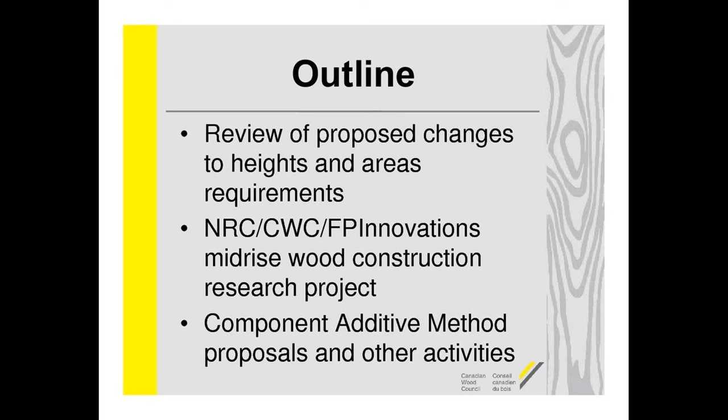As some of you are aware, our code is now an objective-based code, but all the acceptable solutions are still found in Division B of our code nationally. It's Division B subsection 3.2.2 that talks about how to construct a building in terms of heights and areas based on construction type and occupancy type.

Our code has come to the point in 2010 where we really only consider in Canada two types of construction: combustible construction and non-combustible construction. That's different from a lot of other jurisdictions. Even the United States has multiple types of construction that allow different heights and areas for those different types.

In our system, even heavy timber construction has really become just a very small subset, specialty subset of combustible construction, and there's not a lot of different provisions in terms of heights and areas when you're using heavy timber construction.

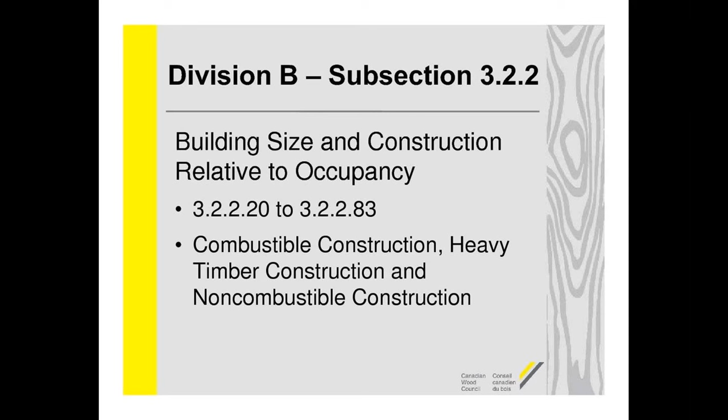So this is just an example, a summary of how our code deals with heights and areas in terms of number of stories and the maximum building area, which is basically the footprint of a building. There's a very specific definition of how to calculate the building area, but of course also within the context of an occupancy type and the number of stories, the maximum allowable building area changes.

That's dependent on whether you've got a sprinklered or unsprinklered building, and whether or not when you've got an unsprinklered building, whether it faces 1, 2, or 3 streets, and that's for firefighter access. Of course, the greater the number of streets you face, the greater the building area permitted.

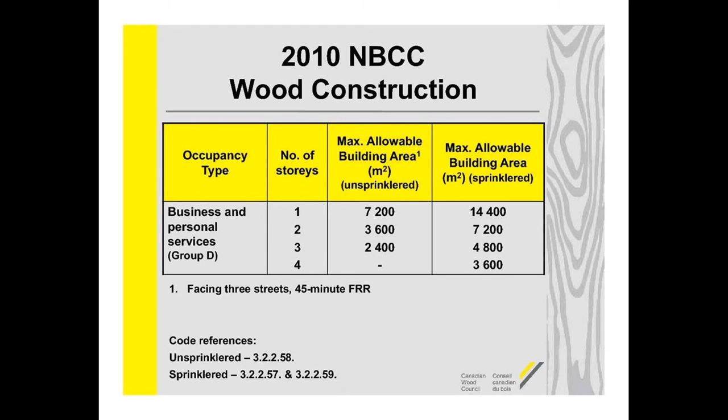Now, not all of you are familiar with the national code process, so I'm just going to give you a little bit of an idea of how it works in general to understand how the code change proposals were developed for mid-rise. The CCBFC, or the Canadian Commission on Building and Fire Codes, is a volunteer stakeholder organization that works with the Codes Centre at NRC as the secretariat that basically provides the overall policy and guidance to the national codes in Canada.

And they do that in consultation and partnership with PTPACC, which is the Provincial Territorial Policy Advisory Committee on Codes. The provinces are directly linked because they're the ones that are required under the law to implement building codes, to adopt them and implement them. So they have their own ideas of the things in their provinces that are important to them, what areas they believe need to be looked at.

And the idea is that at the national level, we would try and coordinate the priorities based on the provincial priorities.

They have provided, in recent years, a lot more guidance as the structure was developed. Under the CCBFC are the standing committees, which are technical bodies made up of volunteers from all segments of the construction industry, providing technical recommendations to the CCBFC on code changes that are necessary or desired. For example, the Standing Committee on Fire Protection or the Standing Committee on Houses and Small Buildings.

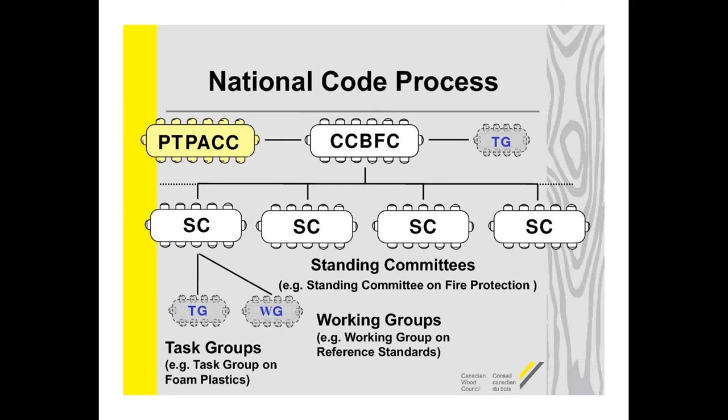When it came to combustible construction, in 2009, some of you are aware, British Columbia put forward a change to their code related to 5- and 6-story combustible construction for residential only. Partly due to that, and due to interest in that code change proposal in other provinces, and because the Canadian Wood Council also was interested in seeing mid-rise combustible construction...

...it was decided that a joint task group should be created, that this should be done in the 2015 code cycle, looking at the whole question of why our codes deal with combustible and non-combustible construction the way they do.

So the Joint Task Group was formed based on that policy decision that this was something that should be looked at. There are often joint task groups when topics affect or deal with more than one part of the code. In this case, it was decided that the joint task group should report to 5 different standing committees.

I'm pretty sure almost all the other standing committees as well have looked at these code change proposals. Even the Part 9 Standing Committee on Houses and Small Buildings has at least reviewed the code change proposals in their meetings, just to keep an overall view of the whole process.

The Joint Task Group was set up like any other task group, made up of stakeholders. The Code Centre has a policy within that system to ensure full representation for all interested stakeholders, as well as regional representation. So there were regulators, industry reps, general interest groups, fire services, different provincial and municipal regulatory bodies, as well as construction material interest groups.

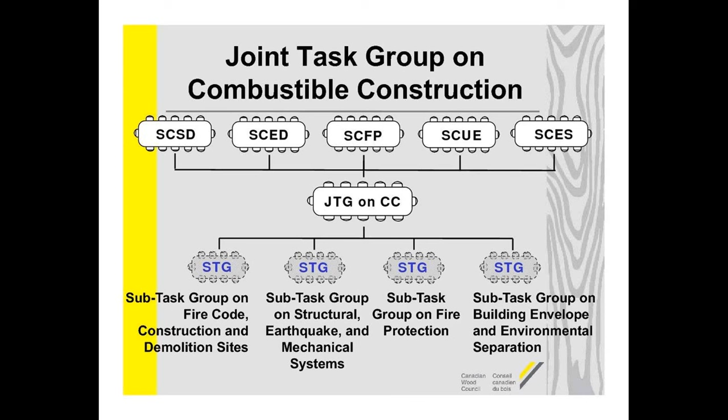The Joint Task Group then provided those finalized recommendations to the Standing Committee, which also wanted some additional information just to ensure everything was covered. The whole process took about 2.5 to 3 years, I believe, and that's where we came to today. The Standing Committees recommended a finalized version go to public consultation this fall, and the CCBFC agreed that the package could go out this fall.

So, as you are probably aware, there is the public consultation ongoing right now, and as I didn't realize until just a week ago, the actual closing date has moved from the original date of December 13th to December 23rd, which is good for me because I haven't reviewed all the code change proposals outside this package yet, and I need that time.

But of course, this public consultation is much more than just the 5 and 6 story issue, and you guys have been talking about some of the other areas. There are a lot of very interesting code change proposals in this package, in part because this is the last major public consultation for the 2015 code, so it's a jam-packed session, really.

What they did was take a methodology that has been pretty consistent in a lot of sections of our code for height scenarios, sometimes referred to as the wedding cake approach, although that's not a fully appropriate analogy. The idea is that you take a certain floor area for 1 story as your building area, and if you divide that floor area by the number of stories to create the building area for that number of stories, you end up with a building with a similar level of risk or hazard, as long as all the other things like construction, fire resistance ratings and other requirements are all the same.

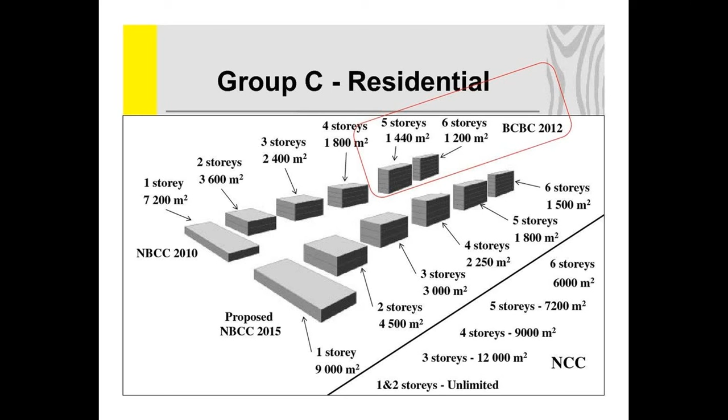One of the other things was that British Columbia, because they wanted to do a relatively quick change in 2009, only looked at Group C. The Joint Task Group agreed that this would be useful for things like Main Streets, where people wanted more density but also wanted small coffee shops, mercantile on the main floor or maybe the first 2 floors, and office space, since you're in a more urban area in a lot of cases with this type of style. So it was proposed that Group D would be permitted to go to a full 6 stories.

Again, looking at what the heights and areas are for the National Building Code, or what BC still has, I did this presentation last week in BC, which is why I show the BC code reference for this one too.

Again, the proposals going forward provide for a larger building area at each number of stories, starting at 18,000 square meters for 1 story instead of 14,400, ending up at 6 stories at 3,000 meters instead of what would have happened with 6 stories if you just took the original areas. And again, we're nowhere near what the non-combustible construction is currently permitted.

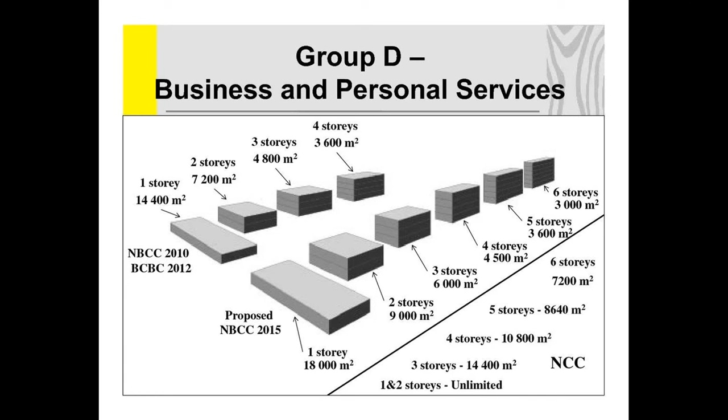As well as being permitted the Group C and Group D, which would mean that any building that contains both of them could be 6 stories of combustible construction with the same requirements in terms of other performance aspects.

One of the other things our code does is if you do not have the group or division type of occupancy permitted to go to a full 6 stories, and you have a major occupancy of that type in your building, you end up having to either make separate buildings or conform the whole building as if the whole building meets the requirements of the code. So the Joint Task Group discussed mixed uses in terms of mercantile in particular.

The Wood Council had proposed a 6-story mercantile, but it was decided that was a little too much at this point, and so instead they've gone this route.

When it comes to mixed uses, Group A Divisions 1 and 3, Group B, and Group F Divisions 1 and 2 will not be permitted at all in a Group C building of this type. But on the first and second story, Group A Division 2, Group E, and Group F Division 3, which is where storage garages and parking garages fit, will be permitted, and actually Group F Division 3 would also be permitted on the third story.

Now, the proposals also include some increased fire resistance ratings for separation between those major occupancies. And there are additional proposals that not only are you permitted these occupancy types as major occupancies within the permitted stories, but you can use the same construction type, combustible construction, 1 hour, except for the requirements for separation between occupancy types, for those parts of the buildings, even though there is no 6-story Group A2 and no 6-story Group E. So there's going to be specific permissions.

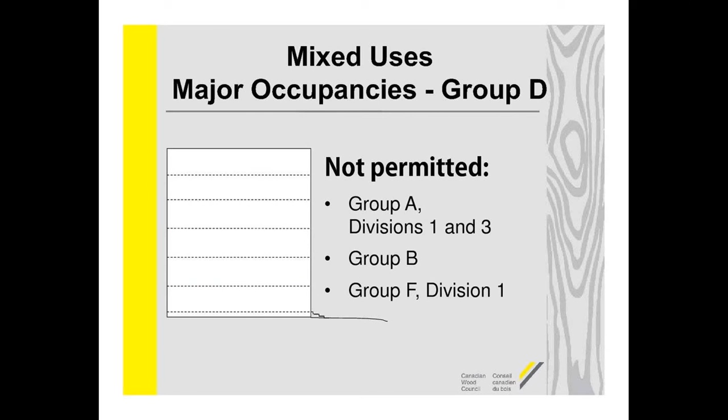The same thing with Group D, even a little bit more, there's less restrictions on what's permitted: Group A Divisions 1 and 3, Group B, and Group F Division 1. In Group D, on the first and second story, you're allowed Group A2, Group E, and Group F Divisions 2 and 3, and again the F3s on the third story, again with some increased fire resistance rating requirements for separations between those major occupancies.

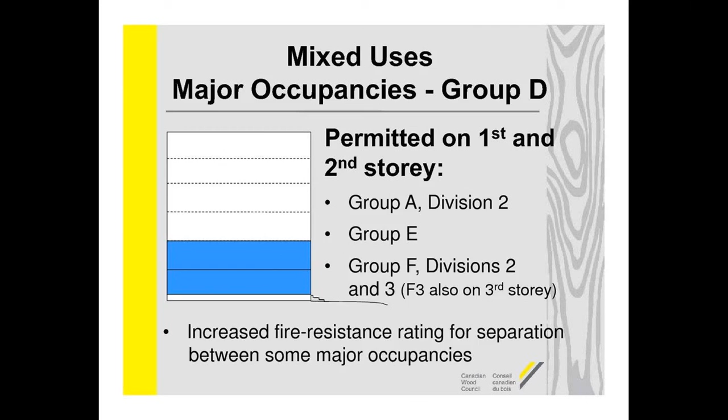In addition to that, a bit like what British Columbia did, there's a new provision - there's almost no place in our building code, except in defining what is considered a high building and when high building requirements kick in, that actually has a physical height restriction. But for these 5- and 6-story buildings, the proposal is to have a physical height restriction based on the distance between the floor of the first story and the floor of the uppermost floor level.

That wording is important because, as some of you are aware, our code has provisions that allow mezzanines to not be considered stories. The discussion was to ensure that a 6-story building, as defined by our code, was physically a 6-story building in terms of sticking to an 18-meter height limit. So as opposed to being the floor on the top story, it's the uppermost floor level - even if that's a mezzanine that doesn't count as a story, that is the distance you're measuring.

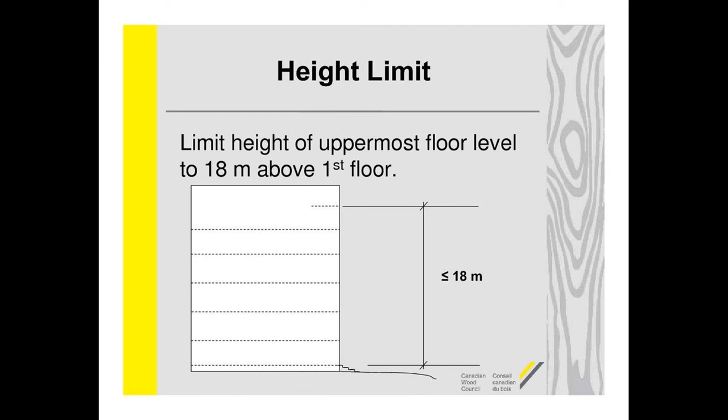One of the other additional requirements is that even though these buildings are sprinklered, there is a requirement for a 1-hour fire resistance rating for the roof, unlike any other building. There are also additional requirements related to the roof. If the highest point of the roof is 25 meters or lower, you can use combustible construction for your roof and Class A, B, or C roof coverings. That's fine - you'd be like any other combustible construction building.

If the highest point of your roof is higher than 25 meters, then the whole roof assembly system has to be non-combustible or fire retardant treated wood system, and the roof covering has to be Class A.

Now, one thing that was brought up was: what happens if you have varying heights on your roof? Well, the language is such that if that varying height of roof can be considered a single contiguous roof - so if parts of the systems join up in terms of the surface of the roofing or the sheathing, or there's a contiguous roof space - then those two roofs have to be taken together.

So if the upper portion is above 25 meters and the lower portion is not, you would still have to meet the upper portion requirements of non-combustible construction or fire retardant wood roof construction and a Class A roof covering. However, if those two sections were considered not contiguous, each can be measured on its own. So if you had a lower section that was completely separate, and that portion was below 25 meters, it would be permitted to be combustible construction with Class A, B, or C covering, and only the upper roof would need to meet the more stringent requirements.

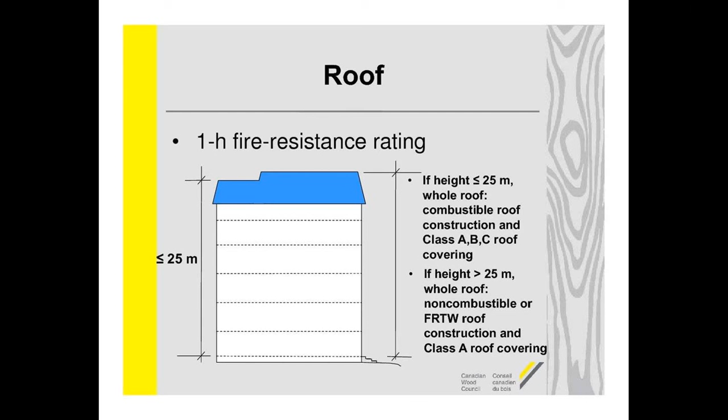Of course, the majority of the extension covers 5- and 6-story buildings, and for business occupancies you need NFPA 13 anyway, so these buildings typically will have NFPA 13. For buildings that are 4 stories or less, because we've provided larger areas for those 1- to 4-story buildings, those will meet NFPA 13R as opposed to NFPA 13, since they are 4 stories or less, which NFPA 13R permits.

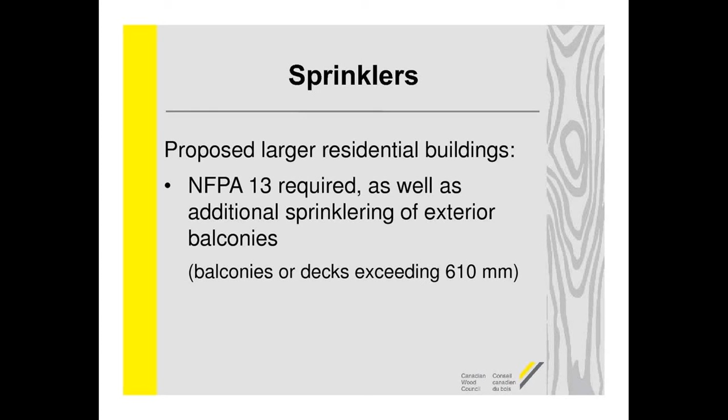A bit different from what British Columbia did on exterior walls - it was decided that the proposal would say that only when you have a building that's 5 or 6 stories under these provisions, and only on the 5th and 6th stories, will the cladding need to be non-combustible or meet the requirements of exterior wall assembly test CAN/ULC S134. British Columbia went with the entire 1 to 6 stories being required regardless - because of how they did the extension, their 5th and 6th stories have to have all non-combustible cladding when you've got 5 and 6 stories.

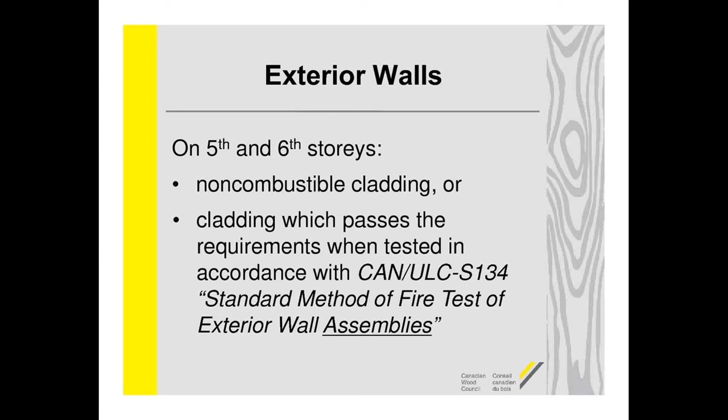One of the big differences from what British Columbia did is this requirement here, which has to do with firefighter access to the exterior of the building. As some of you might know, when you have an unsprinklered building, you're permitted larger building areas based on whether you face 1, 2, or 3 streets. Some of you are also aware that facing 2 streets and facing 3 streets has a strict definition in the code in terms of a percentage of the perimeter of your building, related to how far it is from a street or access route.

To be considered facing 2 streets, 50% of your building's perimeter has to be within 15 meters of a street or access route, and for 3 streets it's 75%. There is no strict percentage requirement within the code currently when considering facing 1 street.

And as a result, the interpretation has been that basically your exits have to face that street. So your exits have to be within 15 meters of a street or access, or your major exit, for it to be considered facing 1 street.

There was concern that that wasn't enough exterior access for these buildings, particularly since the proposal is to go with slightly larger building areas than the current 1 to 4 stories. So the proposal's gone forward for a strict definition of facing 1 street as 25% of the perimeter of the building has to be within 15 meters of a street or access route. I've heard this is a concern in some areas, particularly for infill, where you may have a long, narrow lot — where you're not dealing with that, it's probably less of a concern.

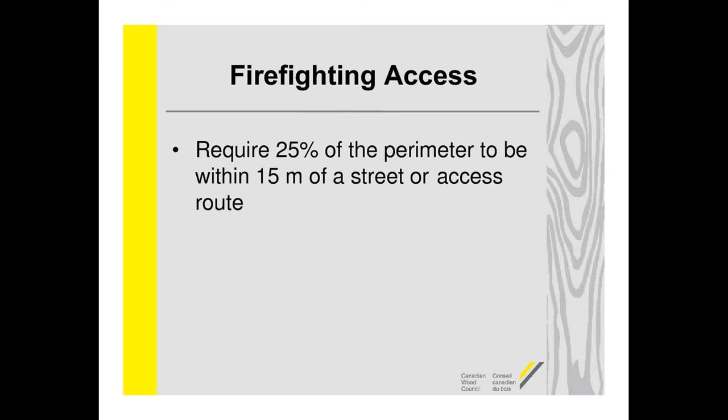Another related thing some people were concerned with was that you can create separate buildings just by putting in a firewall under the code. So there was concern that if you had a very large property or a full city block, you could create an entire block of this type of construction using firewalls, creating separate buildings, and that some of the buildings wouldn't have sufficient access for fire services from the exterior.

This is just an example that the Codes Centre put together. I do have a few slides of these because they did such a nice job of their slides that I didn't want to have to recreate them.

This is one example where, in this particular scenario, because there's no access route or street behind this building — and making the assumption that this is a rectangular building, not a trapezoid, that you're just seeing it in perspective, and that the short sides of each section are the same length and the long sides are the same length — the center portion, called Building 2, would not be considered facing 25% unless that was a square, basically. So this particular configuration would not work for this site under these provisions.

There would have to be some other design scenario in terms of how to divide up the building, and maybe even provision of access routes on the site.

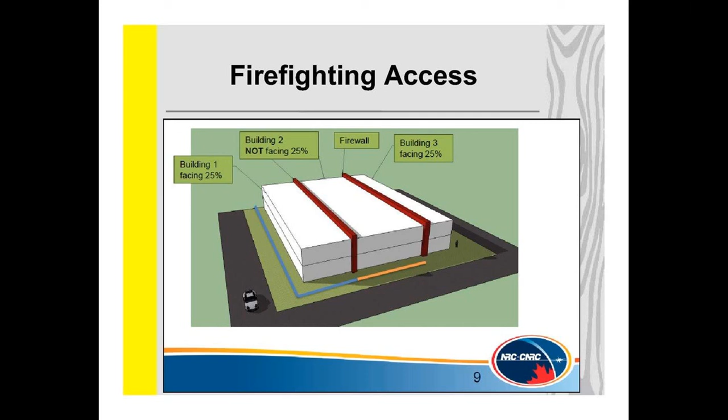The other provision put forward in conjunction with this is that the portion of the street or access route used to measure that 15 meters or 25% of perimeter cannot be more than 2 meters below the floor of the first story. And that's again to facilitate firefighter access.

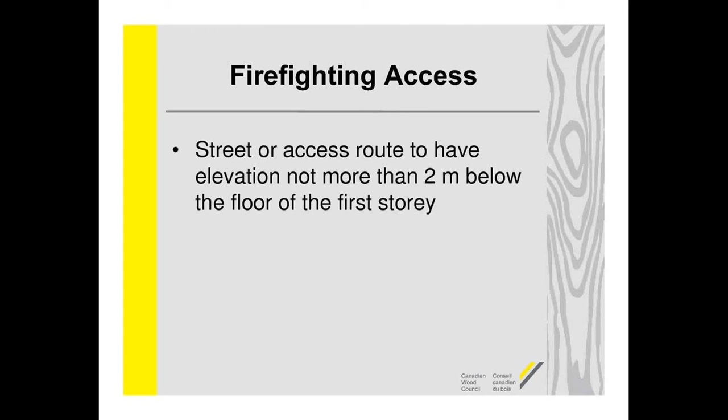Now, you have to picture that this fire truck is not to scale, because if the dimensions are correct, the height of that podium or berm would only be 2 meters — and I'm only 1.5 meters, and fire trucks are taller than me, so the truck would be higher than probably that berm. The idea is that in some places, access routes are sometimes at the bottom of cliffs and hills, and the idea of the 25% perimeter facing a street or access route is so that fire services have access at an accessible height as well as distance.

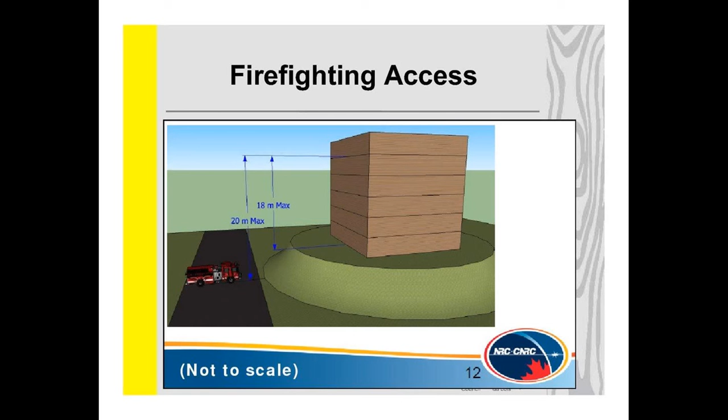As well as those things, there are a few other additional fire protection features proposed as requirements. One is more fire blocking, even in sprinklered combustible concealed spaces, unless they're filled with non-combustible insulation, as per NFPA 13. Part of the idea was that we have bigger buildings, and at this stage we wanted to make sure we were putting as many barriers to fire spread, especially within concealed spaces. Another provision is double duration of emergency power supply for lighting and fire alarm systems.

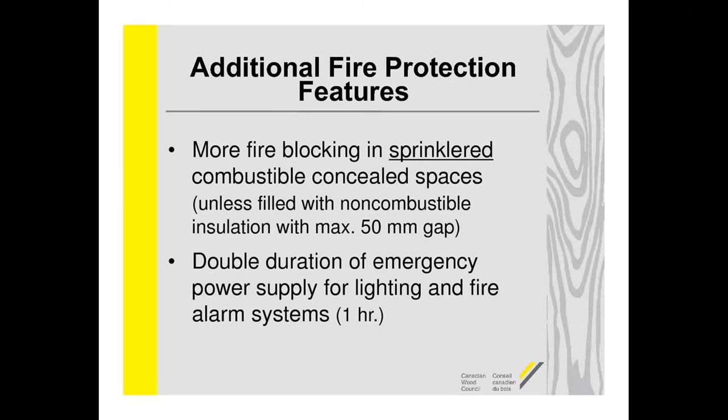One of the subtask groups also dealt with a number of issues on the list related to concerns dealing with construction site safety. At the national level, the Fire Code — the National Fire Code — does have a section, section 5.6 in Part 5 of the code, on construction site safety. So that subtask group reviewed that section and provided some additional proposals for these 5- and 6-storey buildings.

Now, some of these provisions have been discussed at the subtask group, at the joint task group, and in some of the standing committees — that some of these seem pretty reasonable for other buildings, as other construction sites as well.

Because these proposals are all for a new permitted building height and area, there was no cost-benefit analysis required for the code change proposals. However, if you were to put forward similar code change proposals applicable to existing buildings and existing provisions of the code for buildings already permitted, those would require a cost-benefit analysis, and that wasn't within the timeline the subtask group, joint task group, and standing committees had. So it's possible some of the more generic ideas that seem good for other sites as well will be reviewed in the next code cycle.

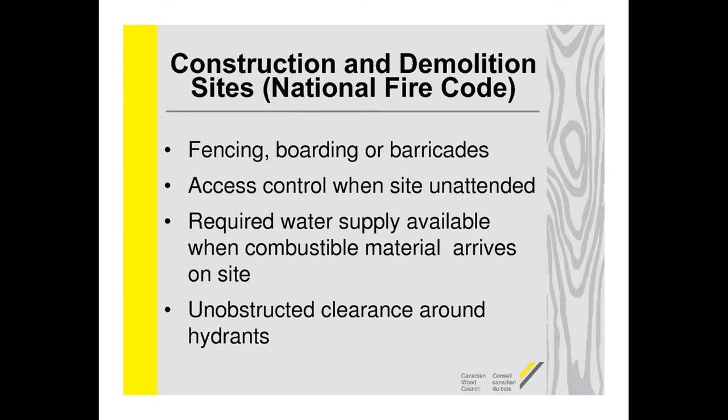Some of these I put in the same category as being a good idea for a lot of different sites, but they're being proposed just for the 5- and 6-storey buildings at this time: minimum clearance between exits and waste containers, so that in case of a dumpster fire, any people within the building under construction can evacuate safely.

For jurisdictions that allow smoking on a construction site, there are currently no fire code provisions about how to deal with that, so proposals address where smoking areas should be located and what type of containers to use. In addition, there are additional requirements for minimum clearances between roofing kettles, exits, means of egress, and exposed combustible materials, again to keep people on the construction site safe from accidental fires.

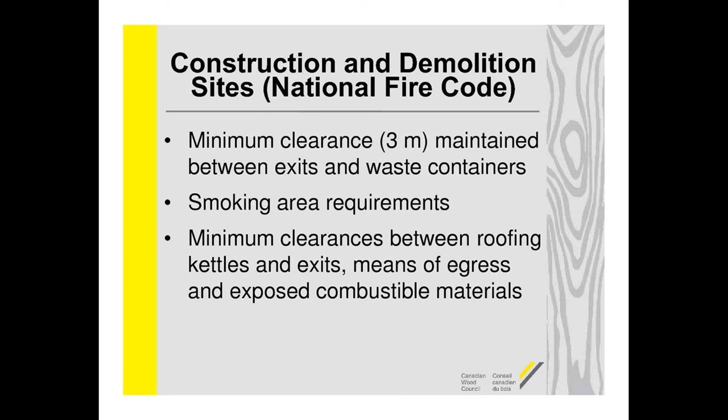We were fortunate in some aspects that British Columbia decided to go first, because they right away had to start thinking about earthquake design. Over the last 4 years there's been a lot of work done. The code didn't have the factors necessary to deal with taller wood buildings, because taller wood buildings weren't permitted under the code, so there was no need up until 2009.

As a result, the very first pass that BC did was very conservative. In 2012 there were some updates provided, based on people reviewing information from other jurisdictions like Japan and Europe, as well as new information being developed in Canada.

My understanding is that the 2015 code change proposals - I believe that under the actual website consultation, these earthquake design proposals aren't under the mid-rise package. They're under Part 4 structural things, in part because some questions were raised about other types of construction as well. So there are some other proposals tied to the whole review done of the safety factors for lateral earthquake force, and that sort of thing. So those are there as well.

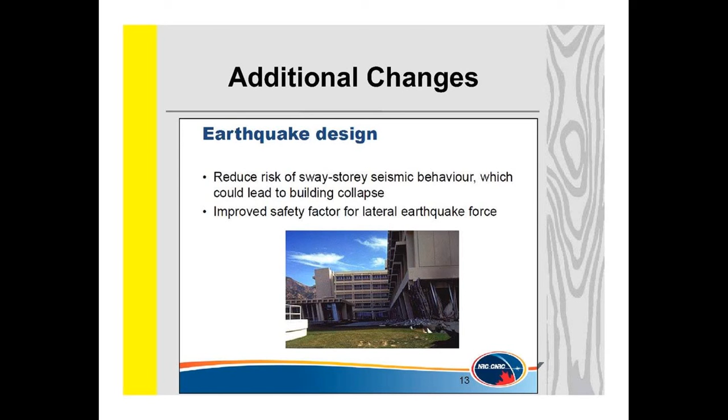The building envelope people at first thought there might need to be some changes, but under review, Part 5 in particular is quite performance-based, so they've only proposed some additional appendix information to remind people that the building envelopes being used for 1 to 4-story buildings of this type may not necessarily be applicable. Review needs to be done to ensure that with higher wind loadings and other things, those building envelopes will work effectively.

And of course, British Columbia has already looked at some of these aspects.

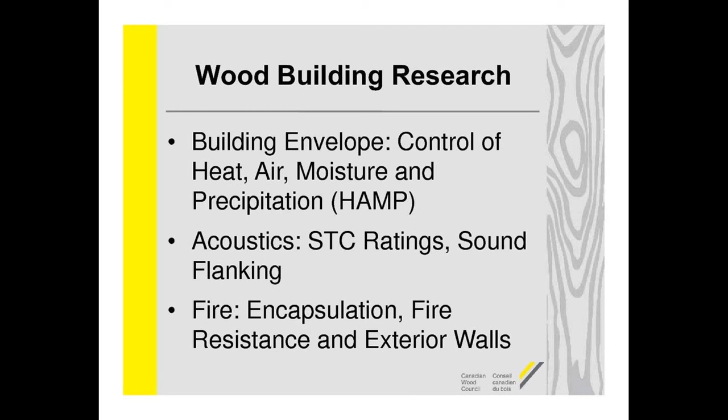When it comes to building envelope, I'm far from an expert, but I'm told they had to identify all the envelope details they wanted to examine and choose climate locations and loadings based on those locations. The researchers looking at this had to wait a bit to see if decisions on the fire side and acoustic side might affect the envelope details they wanted to investigate, so they actually started their part of the research quite a bit later than the other 2 groups.

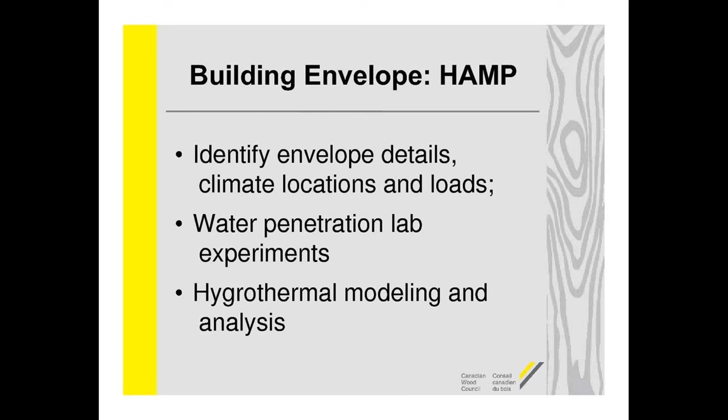But they have done water penetration lab experiments and hygrothermal modeling and analysis. The main point of their part of the research project is to look at some alternate wood-based building envelope solutions developed in British Columbia and elsewhere, in conjunction with practical expected requirements due to structural and other factors, and whether those envelope solutions meet the National Building Code 2010 Part 5 requirements, but also how they meet the National Energy Code for Buildings 2011 overall heat transmission requirements.

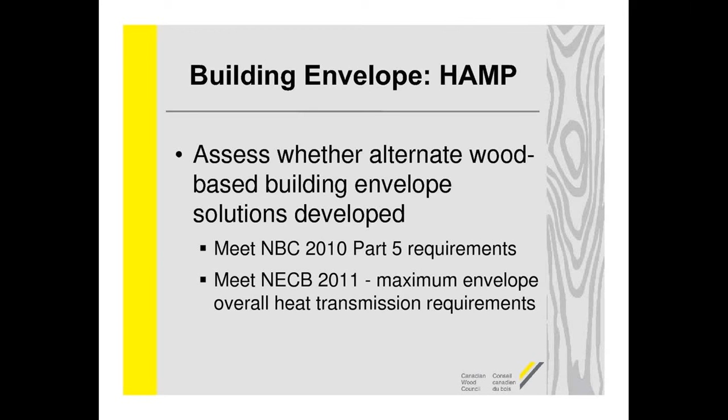In acoustics, as I mentioned, some of the structural things we were looking at - when you have 5- and 6-story light frame wood buildings, you end up, particularly on the 1st and 2nd story, with much higher structural loads that you have to deal with. As a result, we've been seeing some variations on structural walls at those levels for which we didn't have any specific tested information.

In terms of acoustics, the experts could tell us whether the sound transmission class rating would go up or down, but not by how much, and what effects would cancel each other out. So there was a large group of sound transmission class rating tests done on light frame wall assemblies. One aspect was staggered studs, which hadn't been looked at in much detail before, as well as walls with wood shear panels in them.

With single studs, we're seeing sometimes really close spacing to deal with the structural loads, up to the point where in one case I saw 100 millimeters on center, which means you've got about 40 millimeters to get your hammer in to try and put the toenails in to nail this to your top and bottom plate.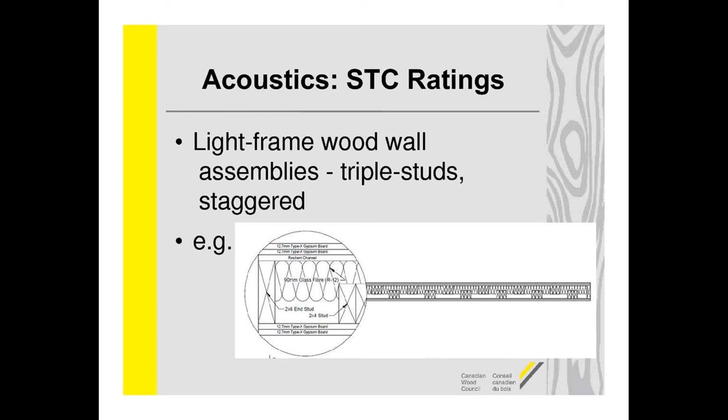We've also seen this new product, cross-laminated timber, that started going gangbusters in North America over the last 3 years. A lot of the information we had on sound transmission class ratings was not generic - it was proprietary information based on European systems. So there was a desire to actually have some generic information.

They've done similar testing on cross-laminated timber systems, walls and floors, again looking at how the attachment of gypsum affects things - first the bare panels, then attachment of membranes, attachment of gypsum using resilient channels, whether screws or nails make a difference, spacing, all sorts of different aspects again.

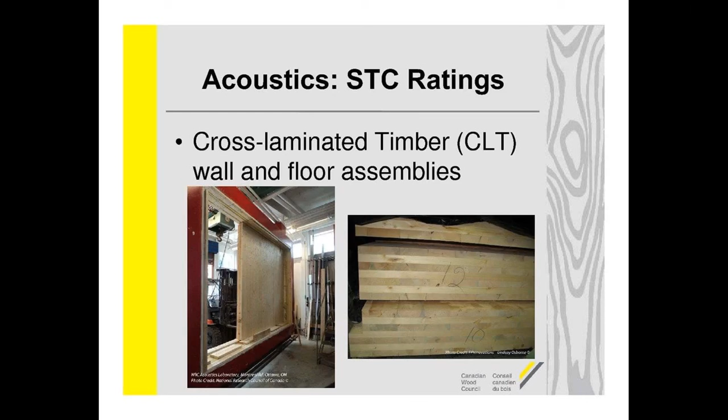Now, a sound transmission class rating is a laboratory test of a single wall or single floor, and as those of you who have built structures know, sometimes how you put those walls and floors together can really affect how well you maintain that effectiveness of the sound transmission class rating. That's due to what's called sound flanking.

Sound flanking has been discussed more as an issue, and the wood industry had done a lot of research into light frame wood assemblies regarding sound flanking. But again, because these wall systems have changed quite a bit, especially on the first and second story to deal with structural loads, it was decided we'd also see how that would affect the sound flanking, because you've got more members coming into your bottom plates. That's going to possibly have more sound transmitted through your floor assembly, that sort of thing. So they've done that testing.

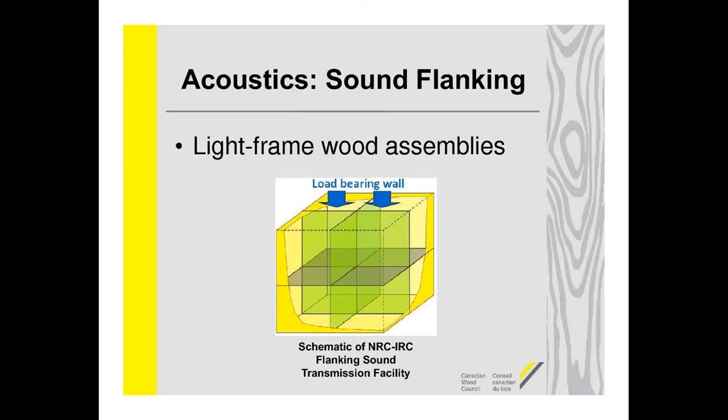They also did sound flanking testing for cross-laminated timber. Now, CLT is a massive timber system, and the NRC acoustic scientists thought: we know there is a calculation methodology for determining the flanking of sound for concrete systems, which is also a massive construction system. They wondered if CLT would behave in a similar manner, that a similar model with maybe different factors due to the different densities and mass, and therefore different sound transmission functions - it has to do with hertz and all that sort of thing - whether they could modify the model to work for CLT.

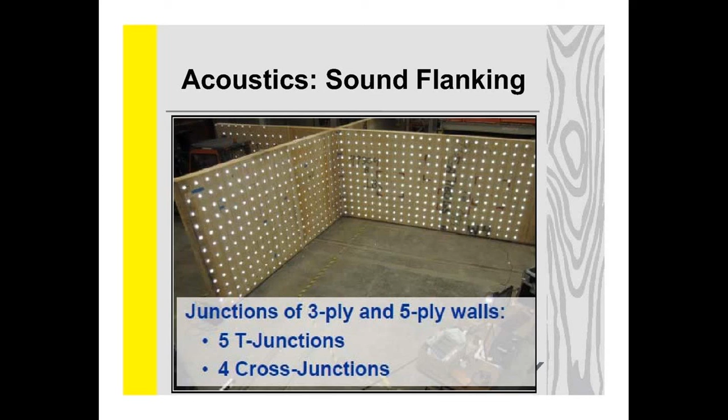And the testing they've done has been promising. Unbeknownst to us, we discovered just, I think in June, a research group in Spain has been looking at a similar methodology, so we've got independent confirmation that this method might work.

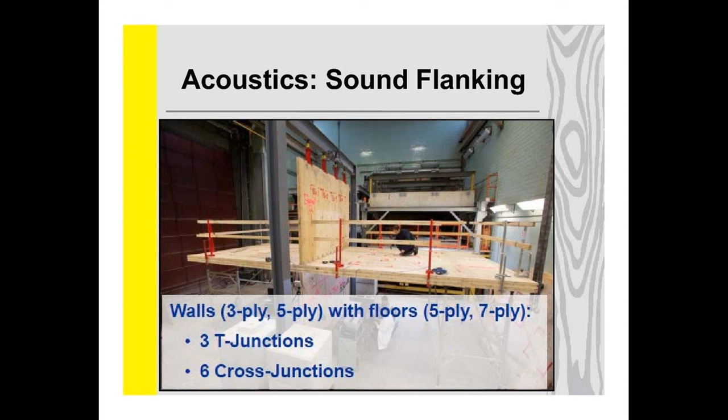One of the reasons why acoustic flanking sound has become even more important is that there's a code change proposal going forward looking at requiring apparent sound transmission class, which incorporates the idea of dealing with sound flanking. So a lot of the information I just talked about will be added to documents put together by a consortium group at NRC, bringing together all the information possible on STC and ASTC, or flanking, for junctions and that sort of thing.

It's available, and there's the information, but it's not easily findable. You have to search for it. There's not a single page, and the URL for this is horrendously long with a bunch of letters and characters like they like to do. So that's why I've given you the directions: go to the main page, choose English, choose the Publications tab, go to the archive, and search for that report number, and you'll find that information.

As that group realized, the number of possible combinations of how to combine walls and floor assemblies is almost infinite. Although this guide has basic information on what to look for and some examples, not everything can be put in there. My understanding is that there's another group at NRC, a consortium of industry and NRC, putting together software called soundPATHS that will also assist. Unlike the wood industry, which does have a lot of this information, the light frame steel industry does not, and is having to generate some of this information, at least on the flanking side.

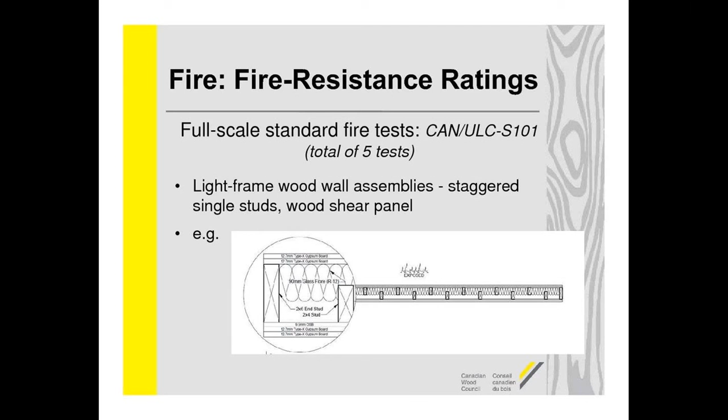So we did five full-scale standard fire resistance tests of light frame wall assemblies. We looked at staggered studs, which we didn't have a lot of information on, wood shear panels, which we also didn't have a lot of information on that we could use, and again, things like triple studs. So we will have additional information that we can provide on the specifics of those aspects.

One of the other aspects we looked at was standard exterior wall testing. I mentioned in the code change proposal that CAN/ULC S134 is one of the ways to test exterior cladding to be allowed. The proposal is for the 5th and 6th story on these buildings. It's also used for spatial separation requirements, sometimes when non-combustible cladding is required due to spatial separation requirements. If you've got a cladding that meets S134 in conjunction with the wall assembly system being used, it can be used. This is also used in the requirements for permission in buildings required to be of non-combustible construction, to permit any type of combustible elements in non-load-bearing combustible elements in that exterior wall assembly.

Currently in the 2010 code, one of the things we decided to do was recognize that in the past there hasn't been a lot of call for cladding systems on a wood-based structural system, in part because the S134 requirements for non-combustible buildings required that all the combustible elements be non-structural. So there hadn't been a lot of testing done with structural wood elements.

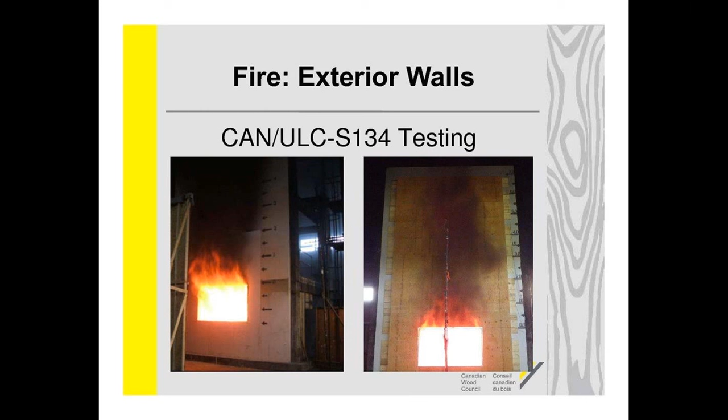So it was decided to try and come up with a series of tests that would test a base system, so that any non-combustible cladding could go onto such a system and would be good to go. This is because not even all non-combustible claddings would pass this test when there are other combustible elements in the wall assembly, and because S134 is a test of the entire wall assembly, it was decided to go this direction.

So four tests were done. Two of them were on light frame 2x6 wall assemblies with spray polyurethane foam insulation. One used standard exterior gypsum sheathing, and the other used fire retardant treated wood. Two assemblies were simulated CLT with 2x6 furring using XPS foam insulation, and again one used gypsum sheathing and one used fire retardant treated wood sheathing.

The idea is that any of these four systems tested, if they pass the requirements within the building code in section 3.1.5 for non-combustible construction, could then be used as a base system for any type of non-combustible cladding. Combustible cladding systems would have to be tested in addition to this. But it would also provide base data for manufacturers of such systems to know where they might stand.

This is a large test. I didn't actually talk about the assembly, but it's almost 7 meters in height. It's a 3-story wall, basically, with a single opening, and something like 4 meters across, maybe. The only facility in the world that can do this test is NRC's lab out near Mississippi Mills.

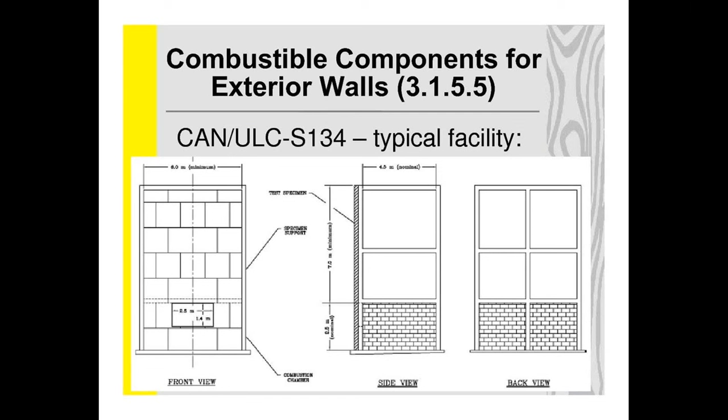They sort of get spurts of people wanting to test for this, but they're the only facility that has this capability. So it's quite an expensive test to do. You don't want to have to test every possible combination if you can get away with some generic information.

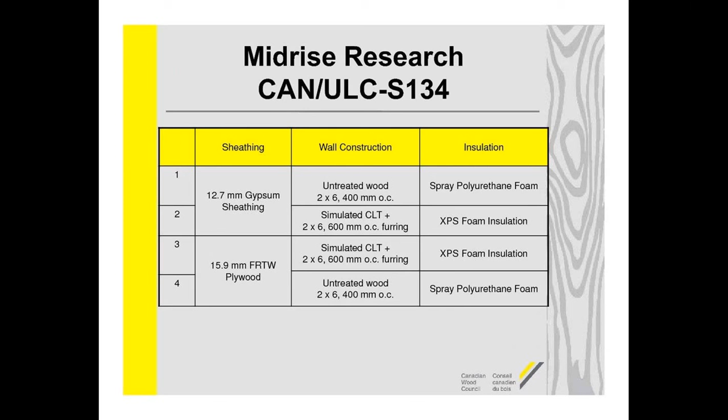The last thing we did in terms of fire was looking at a concept called encapsulation. It's a concept that the Europeans have been using as one means of dealing with combustible structural elements versus non-combustible structural elements. The idea is that the main difference between combustible and non-combustible structural building elements is that combustible elements may eventually contribute to the fire itself. They can provide fuel load once they become involved.

So if you can encapsulate them for a certain period of time so that they do not become involved in that fire, then for that period of time they are performing similarly in that aspect to non-combustible construction. Of course, the actual fire resistance aspect has to be dealt with for all construction types, and so that would still have to be in place.

But in dealing with encapsulation, we first wanted to get some very basic research data as to how some of the typical materials we might use for this type of encapsulation actually perform using the standard fire resistance temperature time curve. We used the intermediate scale furnace, hoping that if this concept goes forward, we could develop a relatively easy and smaller scale test than full scale to evaluate new materials. Using this horizontal furnace at NRC, a smaller furnace, we measured things like the heat transmission through various types of materials considered for encapsulation.

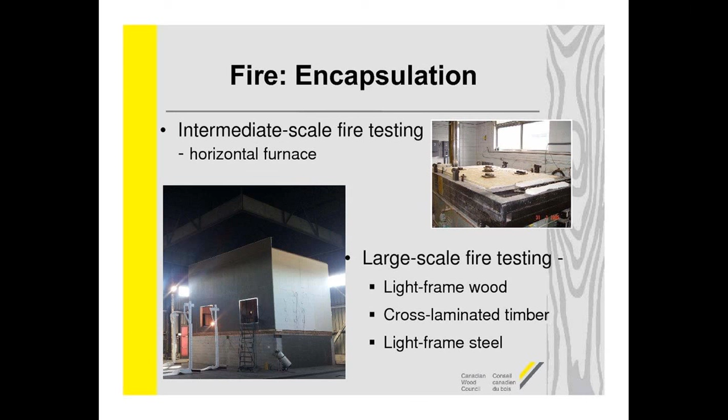We did 3 of these tests with 3 different types of construction. One was light wood frame, one was cross-laminated timber, and for those two we used the encapsulation idea so that all the structural members were encapsulated in 2 layers of Type X gypsum board. Then we did a 3rd test, the exact same scenario and footprint, using code-conforming light frame steel assembly that would be code-conforming for a similar type of building: 5 or 6-story, non-combustible construction, 1-hour fire resistance rating.

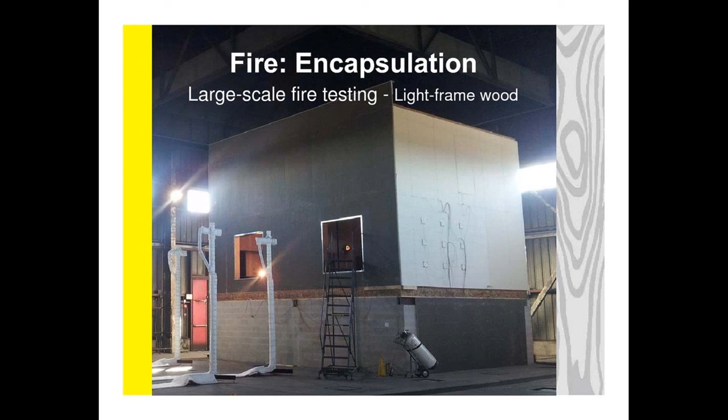So these are just close-ups of a couple of them. The first one was the light wood frame. This is the CLT. You really can't tell the difference other than you can see the rim board changes because it's actually the CLT in this photo, although it's not that clear.

This is the actual layout of the apartment. It was a one-bedroom apartment, fully furnished, and the fire was initiated in the bedroom. The main floor unit, and the unit above, was fully instrumented. We had thermocouples to measure temperature, not only throughout the space but in between gypsum board layers, within the stud cavities, the floor ceiling cavities, in between layers. There was a full floor system in here in that it wasn't just subfloor.

It was, in the light frame wood system, an I-joist with a structural wood panel subfloor, plus we used cement panels to simulate a concrete topping so we didn't have to wait for the concrete to dry. Then we put a full flooring system on there, a wood floor system with acoustic material underlay and all that sort of thing. We basically ignited the bed and watched the fire progress, recording all this information.

In addition, we had the towers you see on the outside of the building to the left. Those are heat flux gauges aimed at the windows to determine how much heat is being generated, measured at different distances from the building. You might vaguely see in the shadows above the building what's called a hood, which captures all the heat and gases generated from the fire. There's instrumentation in there that can calculate the heat release of the fire, and therefore how much fuel is being consumed at any given time.

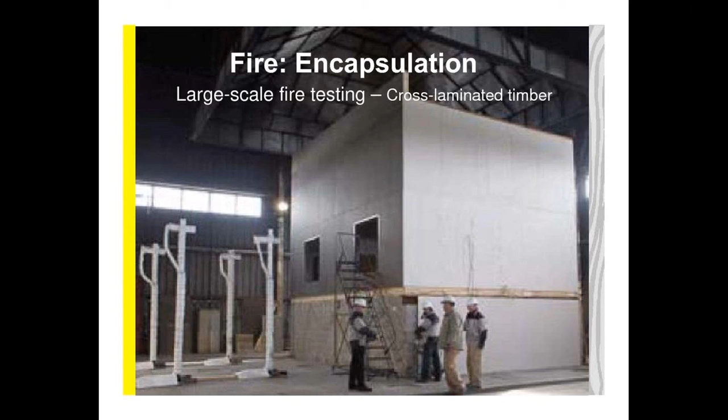So that's the research we've done. As I said, the reports will be forthcoming in the new year. NRC has a deadline of March 31st for this project to be completed. There are multiple test data reports, and then there's the analysis that has to be completed of all the information. I've reviewed 9 reports so far, with 4 more to go, and I believe there's at least 4 more to be written in draft form. So a lot of data has been generated, and there should be a good amount of analysis as well. Look forward to that in the new year.

One of the other things I wanted to mention, in part because I was on the task group that did this, and I really think it was a big achievement for the code process this cycle. A lot of you may be familiar with the Appendix A Part 9 generic fire resistance rating tables, and some of you may also be aware that Part 3 does not reference those tables. So I always get the question of why can't I use those tables for Part 3 buildings?

There's really not a great explanation other than the fact that the data used to update those tables was never incorporated for Part 3 buildings. Currently the only methodology in the code for Part 3 buildings was the component additive method. I think in the past, everybody looked at this and thought, oh my god, this is a huge monumental task. It's not as simple as just filling in a table. It's going to take a lot of work.

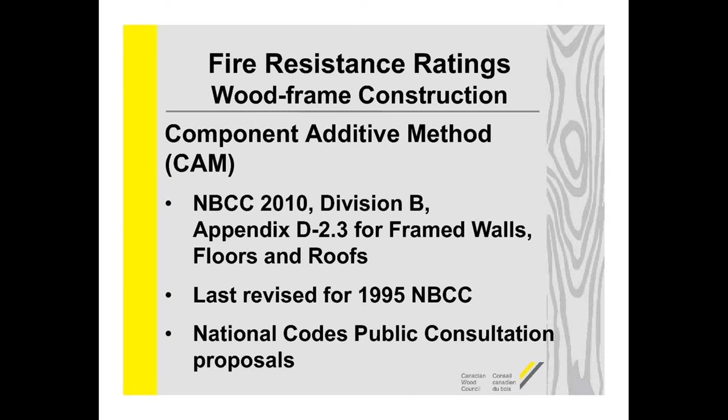So finally, this code cycle, we got through to started at least, and there's been a number of changes proposed. It's in this consultation as well. As I said, the previous versions did not include a lot of the things we currently use in our construction, and in a lot of ways, at least for wood assemblies, there were no more than 8 or 9 assemblies total that you could develop out of that methodology. So it wasn't that useful, other than for the membrane-only fire resistance rating table that's later in the methodology.

The proposal that's gone forward now adds new provisions for double layers of gypsum board. It's added load-bearing cold-formed steel studs and joists—I have to give them a shout-out since we worked on that as well. But also wood I-joists have been introduced and more wood truss types. There's much more information on different insulation types, as much as we could at this point, as well as the locations and how they affect the fire resistance ratings calculated within the methodology, as well as how additional floor toppings affect the fire resistance ratings.

In addition, the current methodology was completely silent on the use of resilient metal channels, which of course for residential buildings and acoustics requirements is pretty much necessary. So that information has also been added in large part.

So the methodology as proposed has really become a lot more usable. The number of possible combinations has grown exponentially. I haven't done the math on that part yet, but certainly it's a lot more than 8. I would think with the various combinations there might be hundreds, especially looking at options like different spacing of joists or studs.

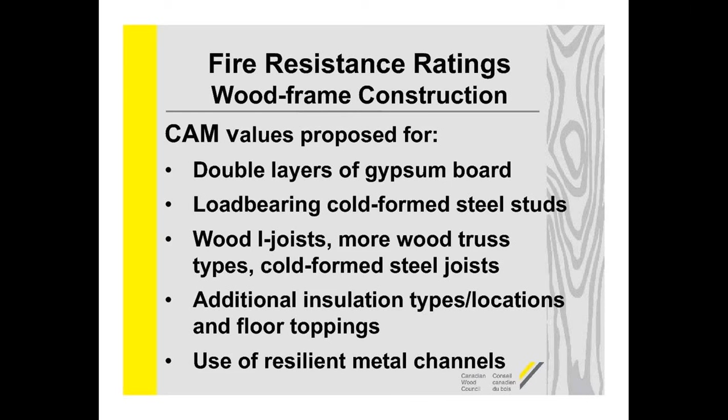Also in this code cycle, some of you may be familiar with Appendix D of the Building Code, D211, which has a methodology for calculating fire resistance ratings for glulam of 1 hour or more. That methodology hasn't been updated in a long time. In the United States, a similar methodology is permitted for both solid sawn heavy timber and glulam, so I often get the question: why can't heavy timber be used?

Why can't it be used for heavy timber? Well, because we haven't changed the code to say you can. Although we've confirmed the methodology is good for that, we didn't get the wording changed.

CSA O86 felt that perhaps what we should do is provide methodology for fire resistance for a lot of different large cross-section wood elements - glulam, solid sawn heavy timber, and structural composite lumber - as an informative annex in CSA O86 in this last cycle.

The methodology is similar to what's in Appendix D - the basic principles are the same - but one thing determined over the years is that some of the Appendix D methodology is a bit overly conservative for some types of beams and columns. Because of the nature of the methodology, it's nice and simple, but that simplification often means you're more conservative than you need to be.

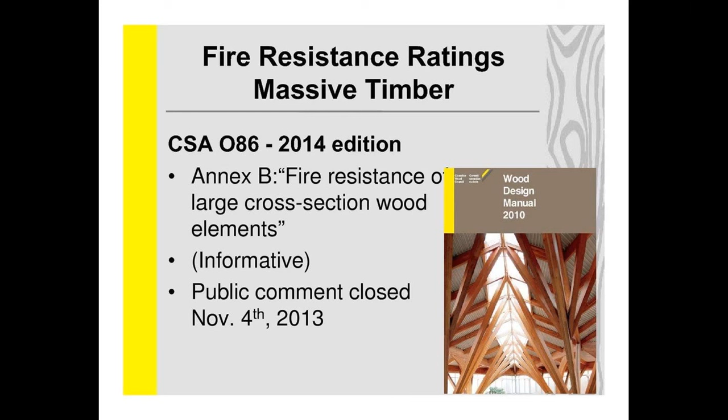There's a bunch of other additional activities going on, just for your information if you want to look them up when they become available, around the world - basically looking at wood construction, in part related to fire, in other parts related to structural.

The Fire Protection Research Foundation in the United States, the foundation of NFPA which does standards like NFPA 13 for sprinklers, commissioned a report called Fire Safety Challenges of Tall Wood Buildings. I haven't heard that it's been published - I thought it was supposed to be end of November, so it's probably going to be published sometime in December. Look for that on the NFPA website - FPRF's link is there, so you could check when it becomes available.

That report is being done by Arup, an international fire protection engineering firm, and it was commissioned for the insurance industry, who often do research through the Fire Protection Research Foundation.

Also, the Canadian Wood Council will be publishing early in the new year a fact-finding report we commissioned from a consultant on historic heights and areas, and it should be a very interesting report. The report itself is quite extensive, containing extracts on heights and areas from English language codes from quite early on to current day, focusing in the last 60 years on both the U.S. and Canada, and prior to that internationally.

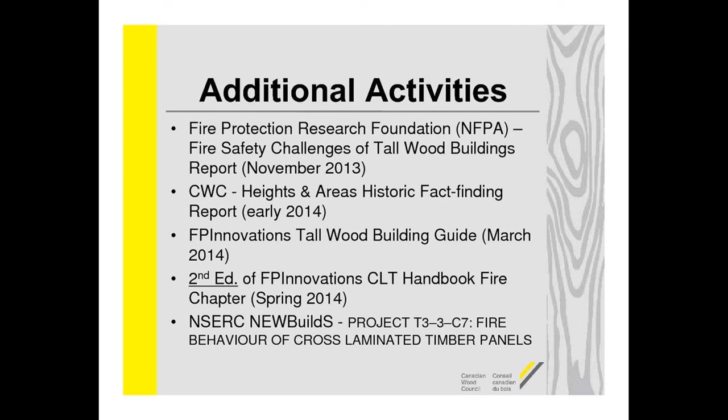As I said, the Canadian Wood Council is one of these bodies, and part of our mandate is to create technical information and tools for builders, designers, and regulators. So look, check our website—we seem to be doing a lot of new stuff lately.

I want to mention, somewhat unrelated to my area of expertise, that one of my colleagues, Rob Jonkman, was involved in producing a wall thermal design calculator. Its purpose is to provide designers with climate zone appropriate insulated wall assembly solutions, so it'd be nice in one place to compare information for different energy efficiency requirements across the country, since different locales use different requirements.

My understanding is that it calculates the total nominal insulation value required in Ontario, the total assembly insulation value through cavities required in Quebec, and the effective insulation value in the National Energy Code for buildings, the Part 9 National Building Code requirements, and similar requirements in Vancouver. This is being updated all the time, and I've been told it should be quite useful.

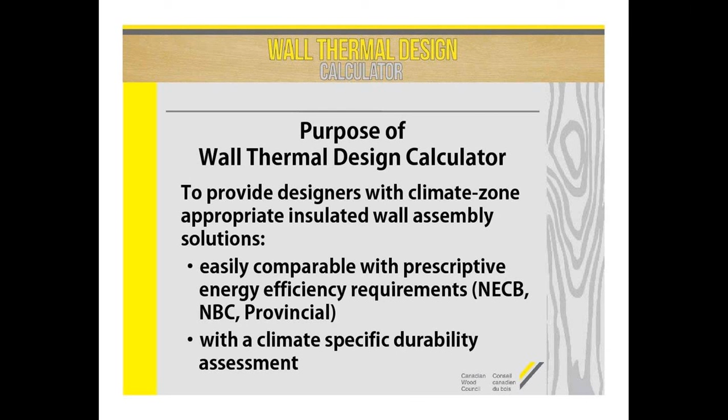The other aspect is that it provides climate-specific durability assessments of wall assemblies, so you may have two or three different types that provide the same R value, but depending on your locale, one might be better for your climate based on durability—it provides that assessment too. If you're interested, you can go to the CWC website, where there's a direct link to the page with the design calculator.

So that's my presentation today. I think I've got a couple of questions here.

Yeah, it looks like we've got one question here, Inika. There's another question that came in, but let's do the first one: How did the BC Building Code and Fire Code respond to the fire in the first 6-story building in 2011?

The fire in the first 6-story building was under construction, and at the national level that was the aspect the subtask group on the Fire Code looked at, leading to proposed changes. The BC Building Code also has construction site safety requirements in its Fire Code. At the provincial level, additional guidance has come through the Fire Marshal's office on construction site safety. There's been education with builders in British Columbia since they're already building these buildings, as well as keeping the fire service in the loop, since they're often responsible for inspecting construction sites for fire safety during construction, at least in BC. In other jurisdictions like Ontario, it's a different provincial department responsible—the Occupational Health and Safety group—so these things are all a matter of education and enforcement.